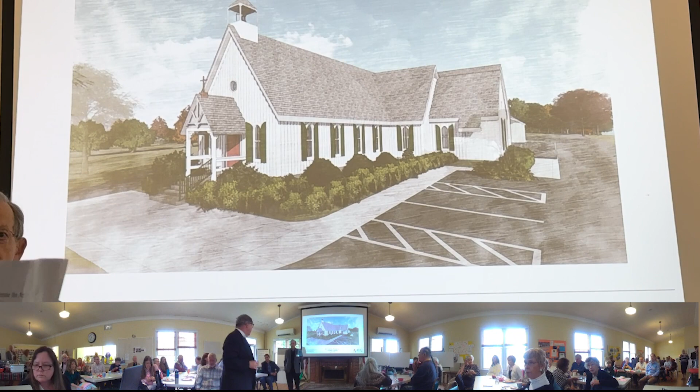Welcome, everybody. We're glad you're with us. We're delighted to show you the work that everybody has been doing over the last, approaching a year and a quarter. We started forming a building committee last March, under the aegis of the vestry.

And I'd like to introduce the architects, or at least the representatives of the architectural firm that we chose during the process: Frank Dittenhafer, who you'll hear a lot of in a moment, and Stephanie Tincher.

Guess who's been doing all the work? We formed the building committee, and there are about 30 people on it. I'm not going to introduce all 30 people, but we set up subcommittees, and there are two that I do want to bring to your attention.

One is the architecture committee that has been working very diligently, particularly over the last 6 months. That consists of Richard Bowles over here, whom you all know, and Bill Brazis, and Kelly Felix, and John Macbeth, who is the chair, and Sue Scheit, and Ron Stupp, who is in southern France. So let's all weep a tear for Ron.

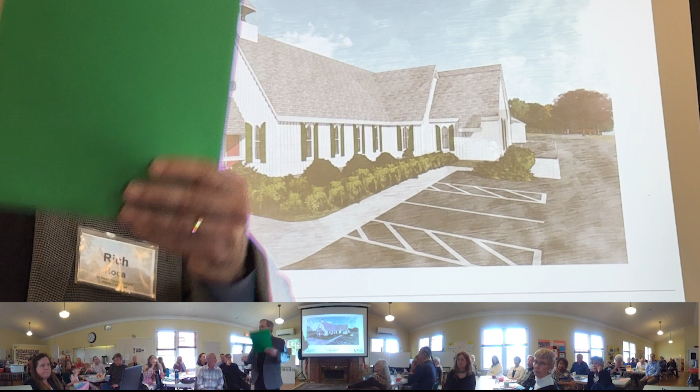The vestry approved that budget, and we've spent April iterating on that particular design—why are we doing this, where's the bathroom here, you forgot a door in this room, little stuff like that. I want to interrupt for a moment to ask Ron Lumen to share where we are with regard to budgets and pledges and the like.

Ron? I'll just take a minute. If you remember the capital campaign we had in 2022, we always said we thought it would be a $5 million-ish project. We didn't really know. The pledges you all came up with, plus a few other things we were able to scrape up, came to $4.2 million in available funds. The vestry decided that's close enough given what we know, and gave that budget to the building committee.

As Rich says, it's coming in more like $6 million. My view, and the vestry concurred, was that we shouldn't just shoot for 6.000 million, but add another 5% for unknown things like inflation and so forth. So what we're really trying to do is 6.3 million.

Now, that sounds like a lot. It is a lot. But right now, about 15 families of our 120 families have quietly stepped up and pledged in total another $1.75 million.

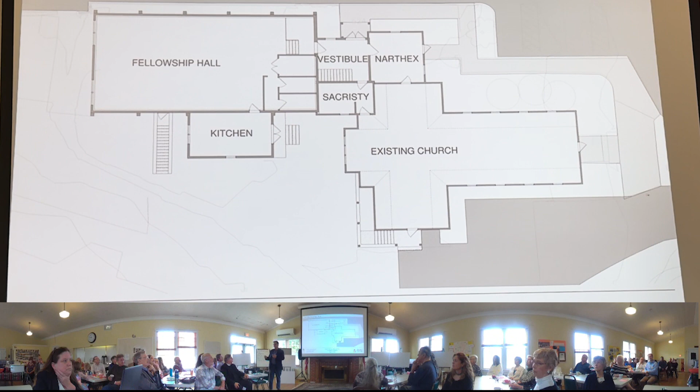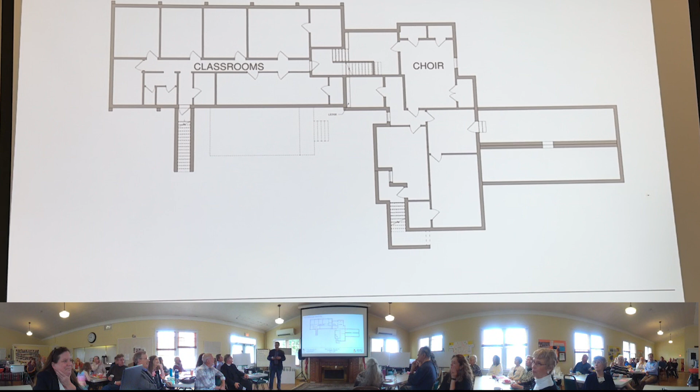At a little larger scale, again, the existing church, the existing entry vestibule and narthex, which all look very nice, the sacristy, and the two-level fellowship hall that we're in, neither of which level is at the same level as the sanctuary, as the church. There's a lower level, the piece immediately under the existing church, and then the two-level fellowship hall. I expressed a lot of reverence for the existing sanctuary, not as much for this building. So we understand, Stephanie and I understand, why you're looking to replace this.

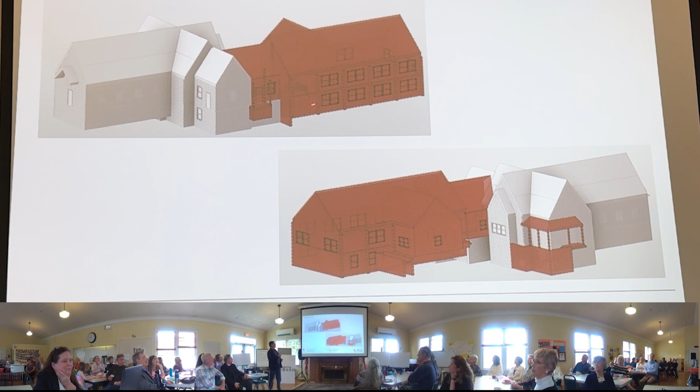We're in schematic design, and the essential starting point is that we're going to demolish this building. Here is the existing church, here is the existing parish hall, and there's a piece at the lower level that also will get demolished. We are very much planning to utilize the lower level under the existing church. We're not abandoning it, we're going to connect to it. It's going to be very important space.

In gross, large scale terms, this is really the footprint, the schematic design footprint of what we are proposing, which covers about a little over 8,300 square feet of program space on the same level as the existing church, with a very small lower level. As you can see in this site plan diagram, it is really maximizing every square foot and every inch available to build on, and it's doing it intentionally on all one level. It's trying not to disrupt or displace too many parking spots. Today it's impressive to see all of the vehicles out there.

The cemetery, the setback line, it's a beautiful setting, but it is one where our approach has to really maximize the buildable area that's there. The existing parish hall, fellowship hall piece is just under 3,000 square feet, and what we're proposing is a footprint of about 8,300 square feet. So it's a significantly larger footprint than what exists.

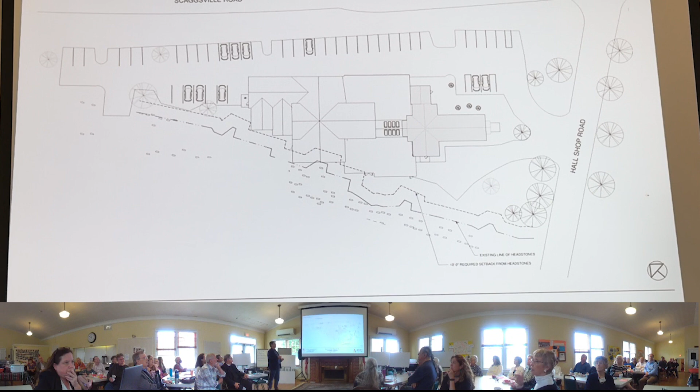Just a bit more of a pictorial image—we've worked out schematically how we think the roof lines, massing, and pieces might come together for this addition. This is a black and white version showing the outline of your existing church, minus the little entry piece, because we are creating a larger entry piece. You can see, in a basic way, how the footprint and the various rooms are knitting itself into the buildable area.

I'll show you some other drawings. There are a number of, we think, very nice and inviting entry points throughout the building on both sides of your site. I think there are really good connections and good flow. There are essentially four zones to the addition. There's a connection piece where one enters and can connect back into the existing church, or connect vertically to a lower level by elevator, and connect to the administrative or vestry area and the multi-use room.

There is a support zone, I'll call it—it has a kitchen, chair and table storage, restrooms, some housekeeping, and a nursery. There is the largest space, which is the new fellowship hall, the room that replaces this room, a clear span space with a slightly taller ceiling and greater capacity for seating and tables. It's a very flexible room—it doesn't have to have round tables, it can be set up many different ways, with much greater capacity than this room. And then there is a classroom zone at the end.

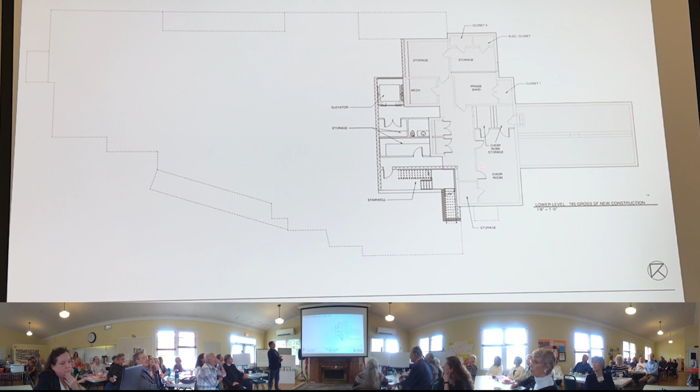The lower level I've been alluding to is again very modest—an elevator, a restroom, some storage rooms, and a stair that I'll talk about.

It should be very comfortable, very welcoming. There should be information there about what might be going on. But it is the place to come in, and from that space you can go further into the parish hall, into the sanctuary, or to the sacristy. The elevator is accessed there, and on this main level the elevator doors open facing this direction.

At the lower level, they open the opposite direction, so it's a very efficient use. It's not uncommon for that type of elevator to be used. So there's an elevator here.

There also is access from this area down a modest hallway to the administrative or vestry suite, which has a series of offices and meeting rooms in it. And behind the elevator, before you get to that suite, is what we think is going to be a very well-used multi-use room.

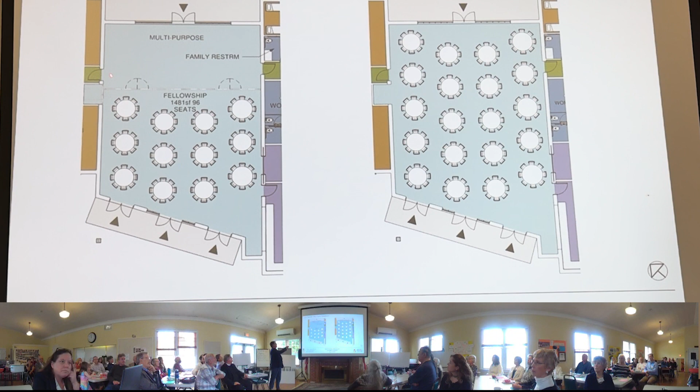So when you have the flexibility to grow into and learn how it works best for you. There is this wonderful multi-purpose zone out there, which we envision would have nice glass and furniture, soft seating. It is not to be — we went through concepts where the green corridor circulation kind of cut right through here, and we had discussions, and we abandoned that approach for this one.

Instead of a dedicated circulation that is nothing more than hallway circulation, we are endorsing this approach, which gives you this multi-purpose room to use however works best for you, however you program it. There can be meetings, classes, simultaneous usage with the folding partition.

And again, this is not giving space over to just hallways and circulation. But I think this is schematically set up very nicely. There is a main entrance with a covered porch area out towards the parking lot. This can function with doors here, doors there. It can function independently.

The church, or even the rest of the expansion, does not need to be open. It can be secured, and there would be ways that this can really function independently for all kinds of events. Here's the kitchen, accessed here, and there can be pre-function things happening here. We also are showing a number of doors that could be open and a fair amount of glass on the other side, so natural daylighting, even with window treatments. This is to be a really nice, accommodating, flexible space.

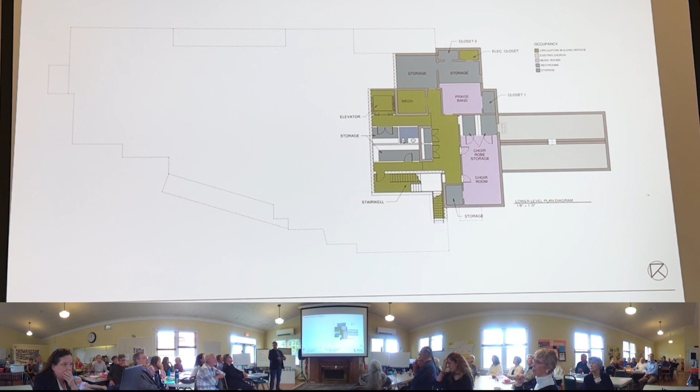Doing a little bit of work in this area for the praise band, and going to utilize a lot of the other spaces for storage that are down there. So again, we're maximizing the utilization of the lower level as much as possible without over-spending on the lower level.

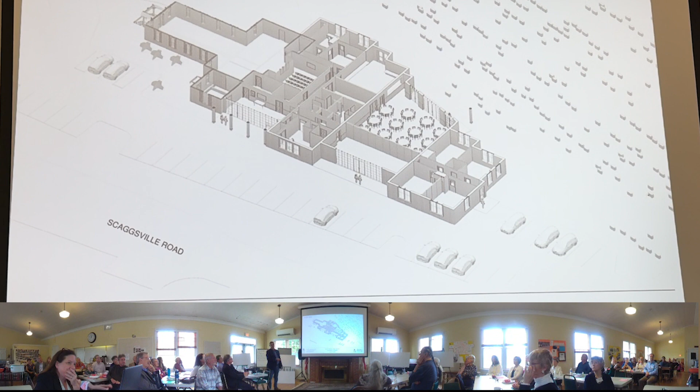So a little bit of a 3D graphic. This is the cemetery over here. We did not accurately show the sizes of all the tombstones.

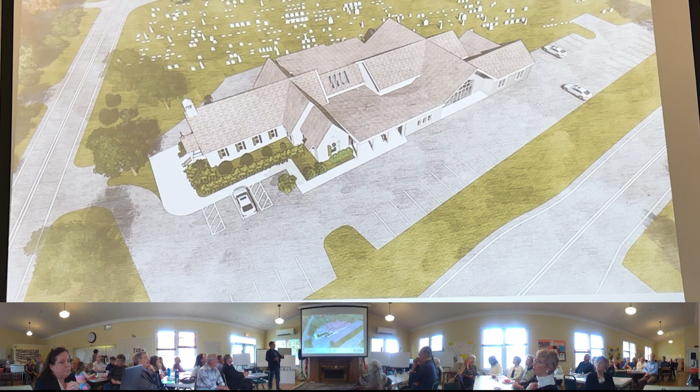So here are just some schematic views. I don't want you to think this is the final design, but Stephanie and I and some other people in our office put together, even at this schematic stage, some images of how it would look.

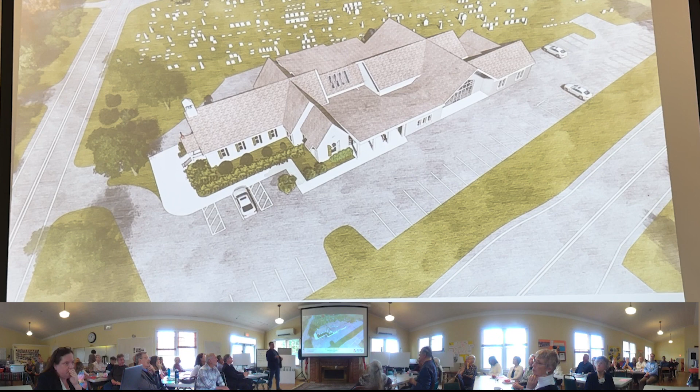This is if you're flying over in your helicopter. There are trees up there, but the idea is that it's a fairly sizable footprint for the reasons I said.

We want it to really blend in and fit in and not overpower the church. So we're very careful, very thoughtful. We look at a lot of options. We don't want anything competing with the gable massing of the church right up next to the church.

We want a little breathing room before we get to the fellowship hall, which is a clear span structure. And yet we want the classroom piece, which is at the end of what we're proposing, to have some gable pitched roofs.

At this stage, our thinking is that everything we are adding on could be white in color, could be a continuation of the board and batten. There are composite materials out there that look pretty good - they're not wood, but they're maintenance free in terms of board and batten. Certainly all the other components could be white - gutters, downspouts, fascias, soffits. So there could be a very elegant approach to a fairly sizable, relatively speaking, expansion here, that everything feels right, fits together in harmony and not in competition.

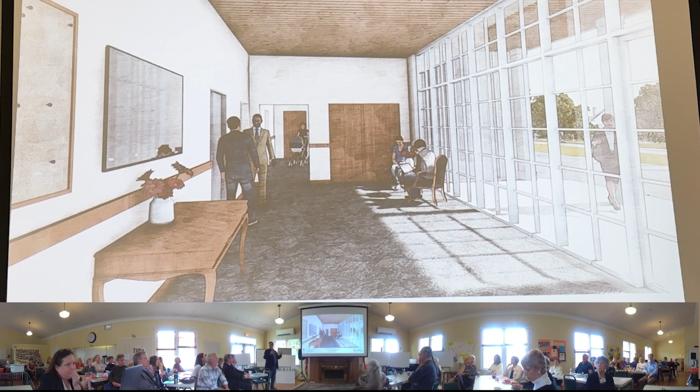That multi-use space, again, we want to preserve and feature the stained glass windows, which we intend to do there. Our thought is to actually have the construction of the roof, with some skylights in it, go up around the stained glass windows. Our building code and fire code investigations thus far have indicated that there needs to be a 2-hour fire rated wall between our expansion and the existing church, which is not that uncommon. So this will be a rated wall, and you can get 2-hour fire rated clear glass.

So that's our intention. Even with a fire rated wall, we have really high hopes that this will be a wonderful room to be in - the qualities of it very flexible, very well utilized.

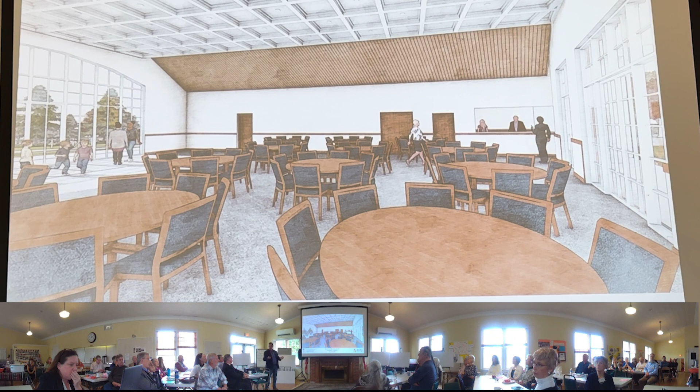Again, snapshot schematically of the fellowship hall, which is the largest space in the project. We want a ceiling height that is taller, in a room of that size which is wider - a better proportioned space than this, not just larger square footage wise, but wider, more flexible. We might integrate some wood, and there are a number of ceiling systems that can be articulated, that are acoustical in nature and elegant. We want to give you a very nice, not institutional fellowship hall, with the ability for daylight and access out of either side.

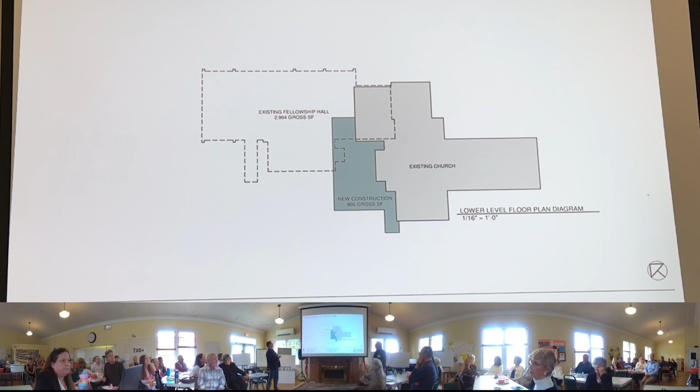How many of the existing trees will have to be sacrificed along the parking lot? Looking at the site plan, the ones that are beyond - I think only one, going back to the existing chestnut tree. We don't want to take down any more than are necessary for sure. Going back, I think there was that tree too - so I think there's, well, I'll say two. If that one is inside the setback line, I think it might be one, so two of them.

I'm concerned about the light in the three windows. Sitting in church this morning and looking at the windows, the natural light is a really important element for us. How can you guarantee that the degree of natural light we have lighting those windows will remain the same? Skylights are all well and good, but there's a limit. You're absolutely right - we envision that artificial light, in addition to natural light, is what we should have there. We don't want to depend totally on the skylights and natural light. We want to have that option, but we envision having some artificial lighting to supplement that, so you don't lose whatever effect we want to make.

Can you model that so you have a high degree of certainty before you actually do it, so we're not disappointed in what we get? It's possible. I would want that.

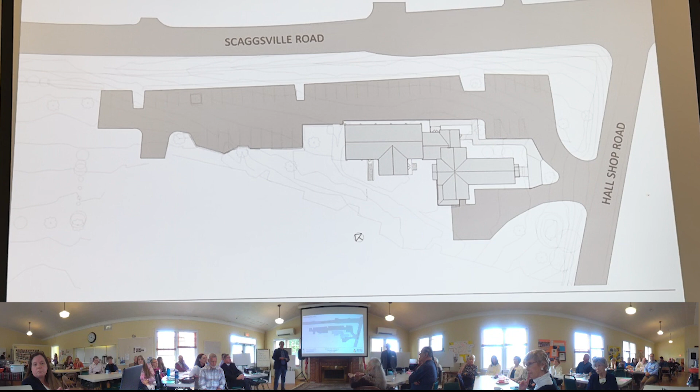It would be nice to see an attempt at that and compare it to what we've done. Sure, we're very sensitive to that topic. Like square columns instead of round columns - we have square columns.

Okay, on the front view, the Scaggsville Road view, where you go in and look back - okay, where the 4 columns are, that area, could that be brought out and be working space rather than open space? Or what is its function as an open space? Why is it that way?

In the plan, it's an entry lobby area to meet and gather, there's chairs, so this is outside of that. The thinking is that it's just a bit of coverage from weather, to meet and gather and talk out there prior to entering or after exiting. So it's intentionally an outdoor covered area to supplement what's happening immediately inside.

My experience is a lot of conversations and important things happen before and after, and sometimes they need to happen outside of the building versus inside. So it's not a large area, but it's intentionally outside - the dimension is around 8 or 9 feet. It's not large.

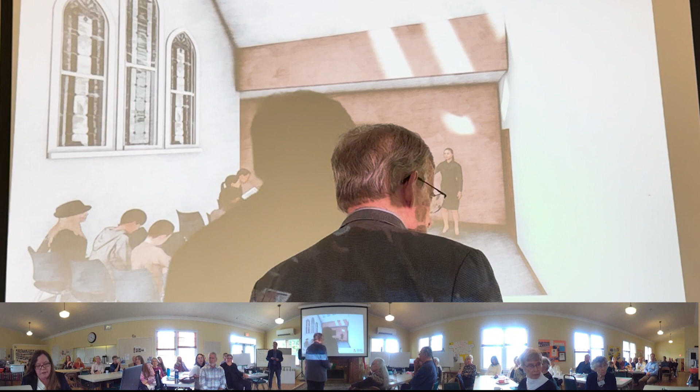For the fellowship hall, when that partition is opened, how does the total square footage compare with the square footage we have in this room now? So you're going to get an increase of about 40% when it's completely open. Right now you're at about 1,500 square feet, and if the partition is open, you'll be at about 2,200 square feet - and not just more square footage, but a dimension, a width and length, that are much different than this.

I have a question for Rich. Will all of the functions being done in the parish house be contained in this new building, or will there still be a need for the parish house? We haven't done a detailed study. Certainly all the administrative work comes over. Are there other functions besides administrative work? I would say there will be a need for it, but I'm sure it can be used.

Okay, looking for a place to rent out? Or a place to sell. Except for we need the parking lot. Yes, we need to - we're not going to get into that discussion here. That's a quasi-theological one.

Are there focused light pipes that could be directed at the church windows, for natural lighting? I can't tell if there's any light coming in this wall, but could some be directed in that direction? It's a possibility - you can do things like that. We'll explore some options for the best natural light and artificial light. There are 8 skylights, 4 on each side of the room. Okay, so they're both covered in this, okay.

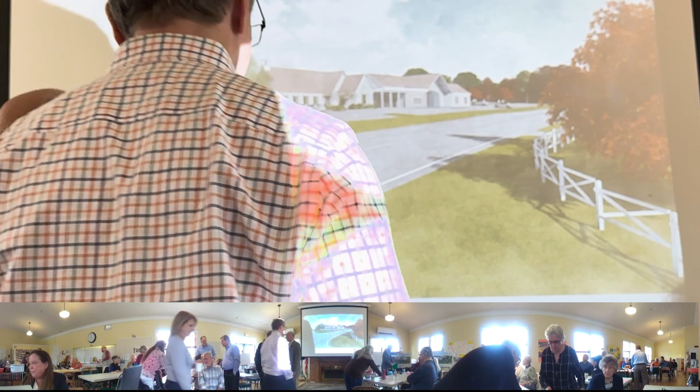Double check this, make sure it's still recording. It is. Oh no, I got a phone right there. Oh, sorry, I didn't touch anything. No, you're good, I just want to make sure it's still running.

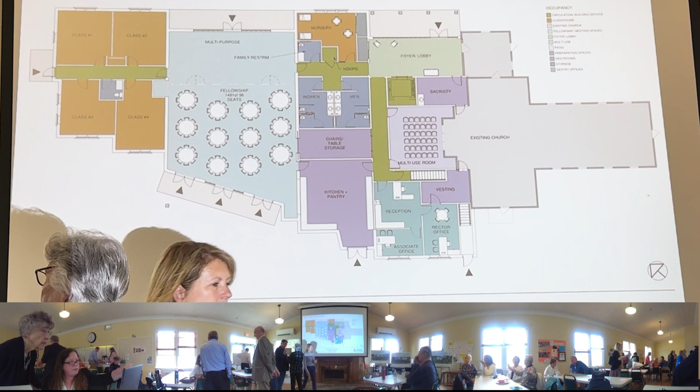I was going to show her where the new office is actually. Alright, so if you enter in, here's the new lobby, right? And the parking lot. So if you come in, you'll have a chance to turn this way to go to the existing church, turn this way to go to the new fellowship hall, or go straight, and then you have the new offices down here. So there's a work area, the rector's office is here, and then an associate.

Well, actually, no, this is a stairwell to the basement. They took this for building code reasons, they need to have direct access to the exterior of the basement. But if he's in service, his office is here, his vesting room is here, and then he can go straight from his office to the vesting room into the... yeah, so a nice big space.

Oh sure, yeah, see now I can see it. Yeah, but yeah, nice big kitchen. Like Frank was saying, we don't have all the appliances laid out yet, but it's a generous space for the kitchen, so everybody should have plenty of space.

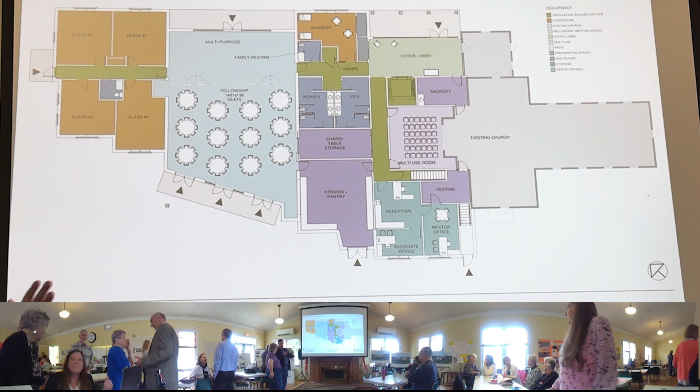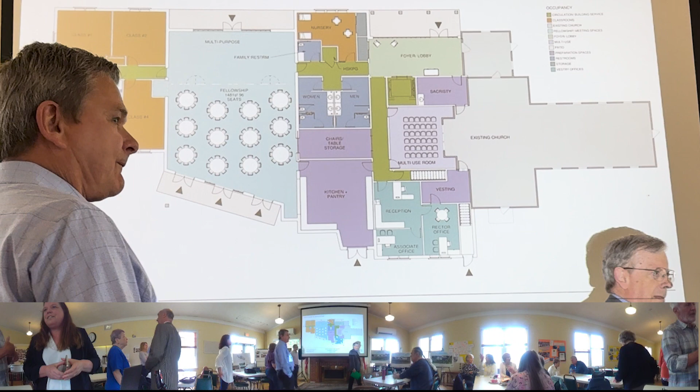Oh my gosh. I'll defer to John and Rich for that. Right.

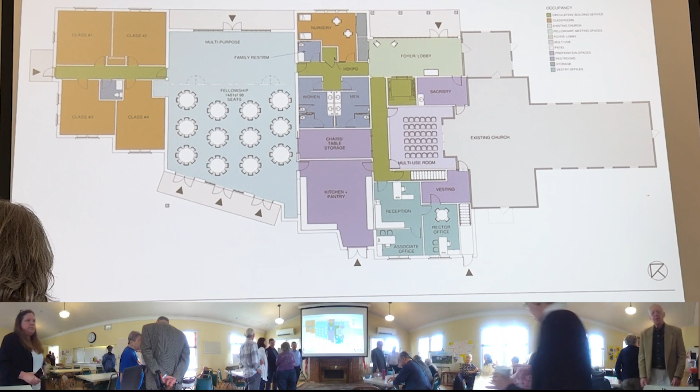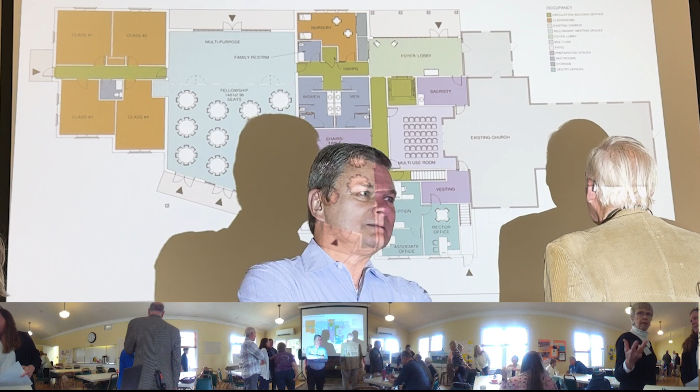I really like the way the plan incorporates all the functions that we need. Yeah, and we don't have a lot of overlap. Right, good. I think if you could take a picture of it and send it, we'll get close to it. Do that.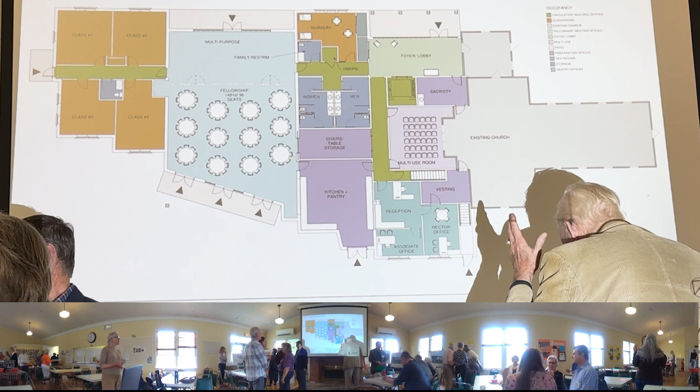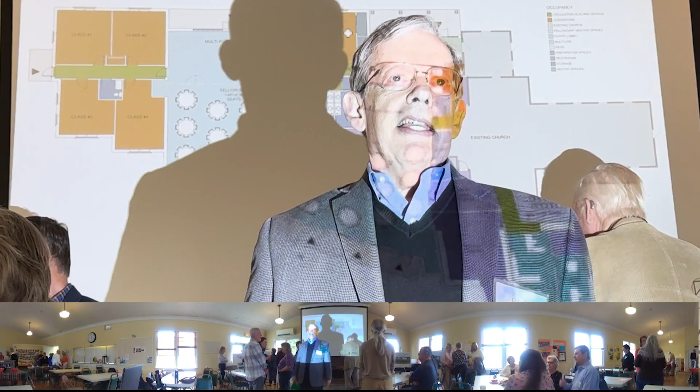Okay, does anybody want to engage the program committee, or are we done? Done?

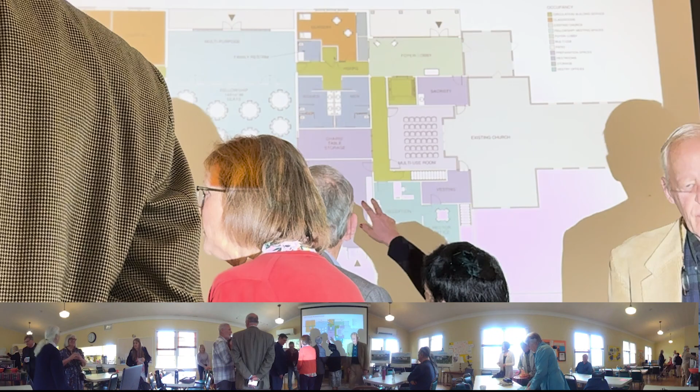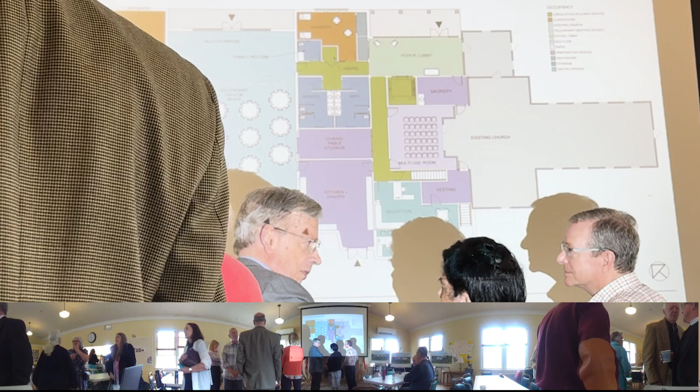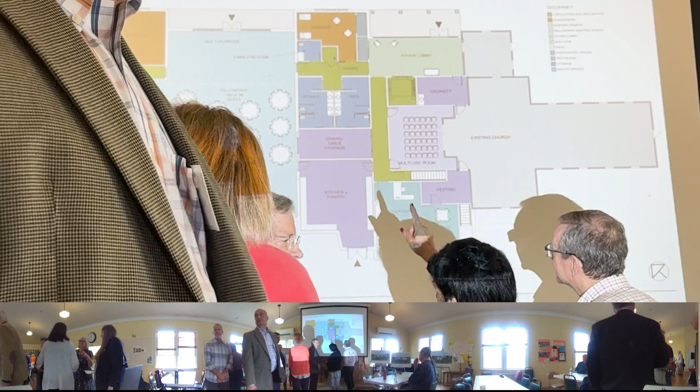You haven't run, you didn't run her off. What's that? You didn't run her off. No, not yet, not yet.

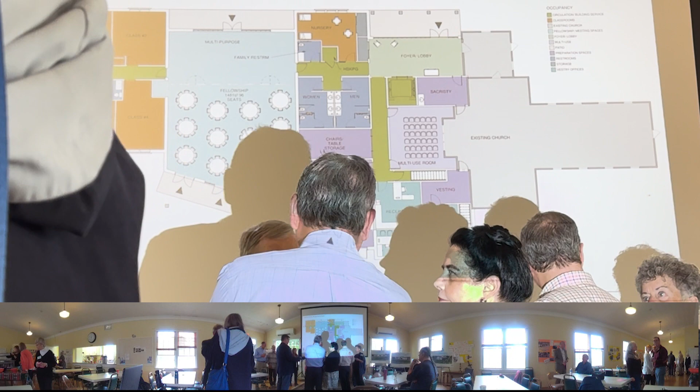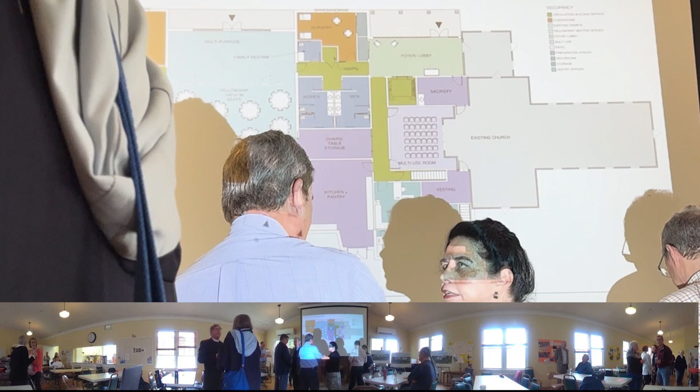Is Nancy on the picture? She's not, so we have to survey. Exactly, exactly, well, and how we do it. So this is what we're trying to do, because there are several options. And I think she...